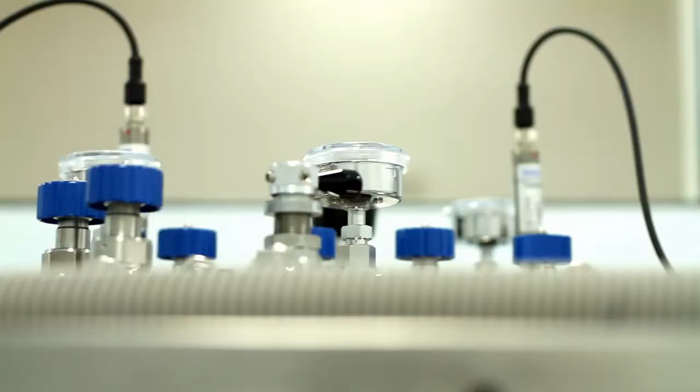Life is beautiful when it is certain and fearful when it is uncertain. The thin line between beautiful and fearful is safety of life.

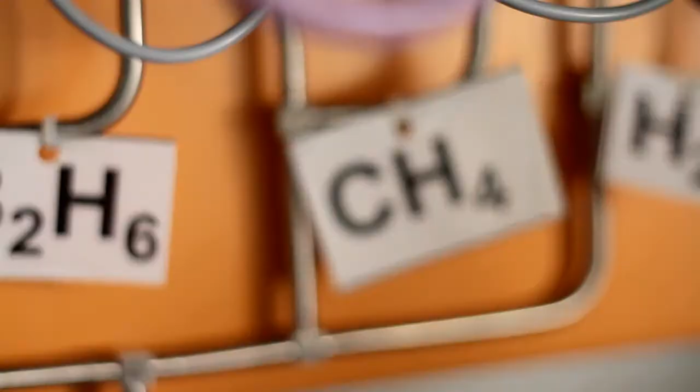We deal with a variety of processes and technologies. If not handled right, it can be quite disastrous to us.

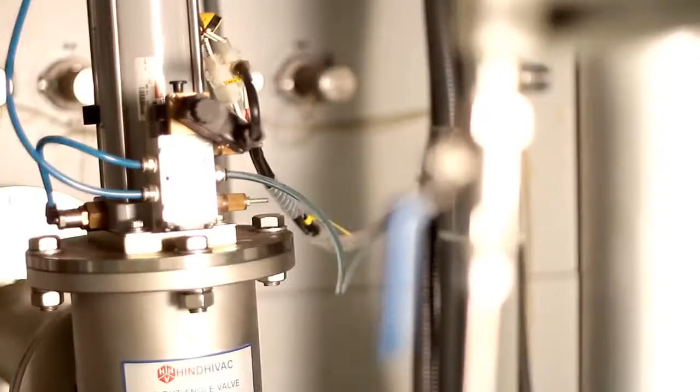This is an area where you want to work with somebody whom you can trust, with a lot of positive energy, which is what I find when I interact with the UHP team, both in their offices and in their sites.

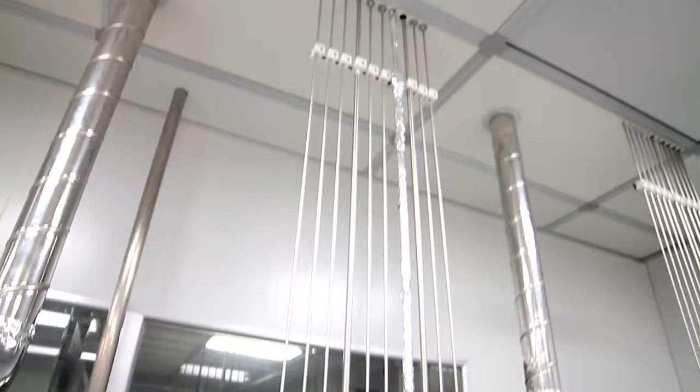We had to build the clean room with not just one gas, but 23 to 30 odd gases, many of them as toxic as silane, arsine or phosphine, where we needed complex piping which required a high level of safety.

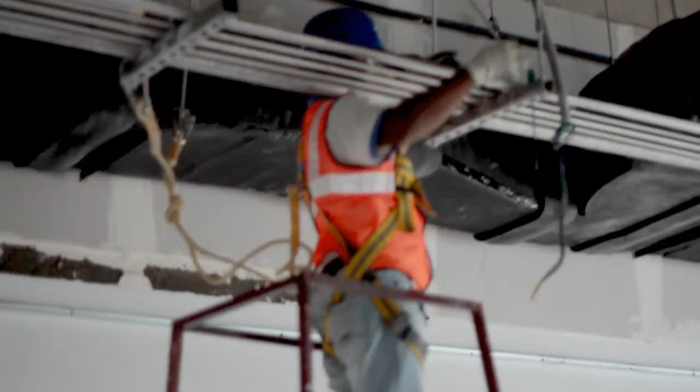And that's when the decision was taken that UHP will be our gas vendor. The key strengths of UHP are adaptability to change, innovation, management, execution, and of course the most important is safety. We get associated with them to do a lot of other projects where precision and accuracy are of prime importance.

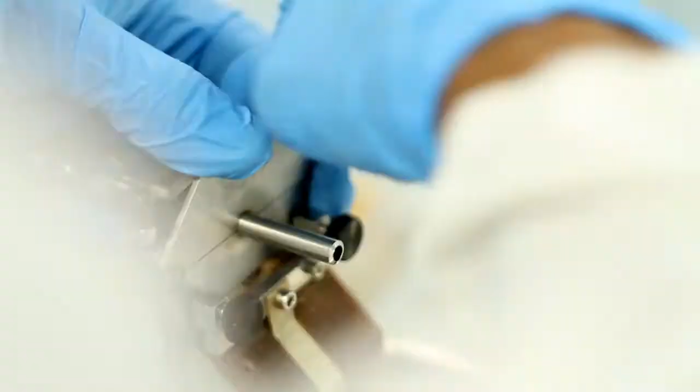When you have to set up such a complicated system involving 23 gases, you have to first make the blueprints or maps that show how the gas lines are running, what are all the individual components in there, and how you design the entire system.

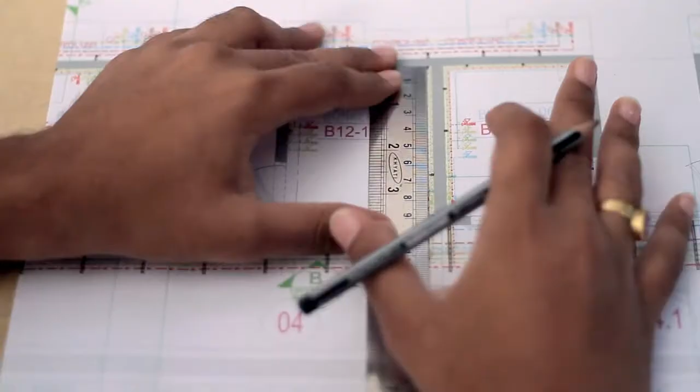And when I saw the drawings that came from UHP, they were even better than the drawings we received from the main contractor who was building the clean room.

They will take it very seriously. They would rectify if there was any mistake. If there was no mistake but it was perceived as a mistake, they would explain to us very politely.

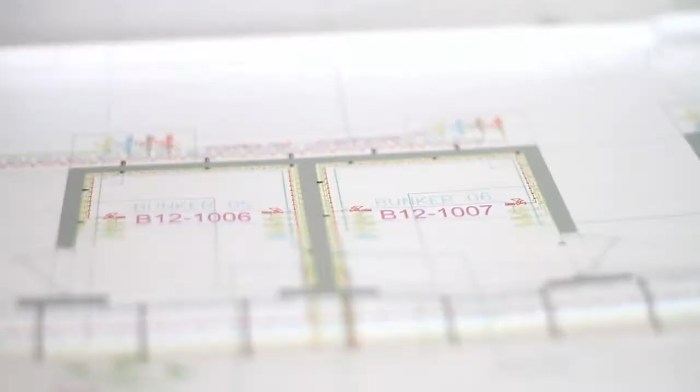They stay very close to the customer, taking feedback not just at the beginning of the project but throughout the execution. I have seen UHP Technologies putting a lot of effort into educating their customers, making them understand.

If I'm not wrong, there will be roughly around 100 employees, but if you see, they are working like 1,000. The way a company with 1,000 employees works, that is the unique way UHP Technologies work. I think it is one of the most unique companies I have ever seen in this field of engineering.

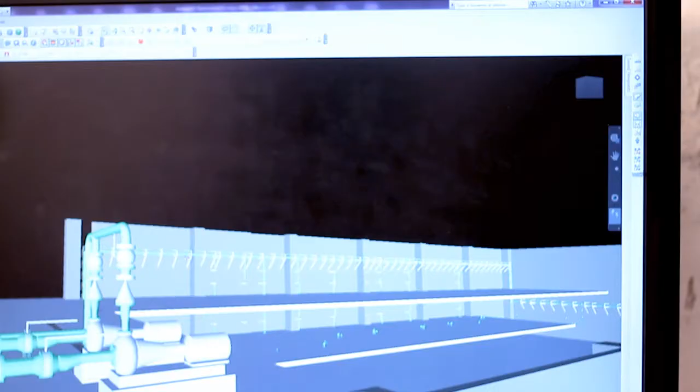Something UHP does is understand the customer pretty well. When we look at the design aspect of our solutions, we don't just limit our working to the current needs of the customer. We go much beyond the current needs and make sure that when the customer expands, when he goes into growth mode or the next level of expansion, he has all the vital elements to expand seamlessly rather than reinvesting for every basic need.

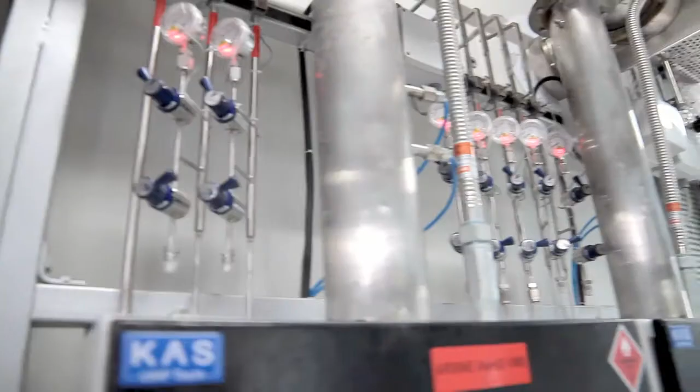During the course of the conversation, I felt that here was a man who understood the dangers of dealing with something as toxic as this. This is the first of its kind in the country. It's a company which has been providing total customer satisfaction.

If certain things are required to be changed during the course of the project, and we have constraints on timelines and budget, normally UHP comes with an idea that fits the timeline and also the budget.

In the DNA of the company, we compete with ourselves and we improve ourselves. I have always seen them innovating new things in their product line.

The detectors and their locations, the quality of the welding that they have done, the quality control they have put themselves through in terms of testing the lines for leak tightness, cleanliness, moisture content and so on and so forth - UHP did a far better professional job than the main vendor.

From all sides, you can say that the quality side was very good and the safety side was perfect. Only good words I can say about this company.

They leave no stone unturned to execute a project, and timely and within the budget.

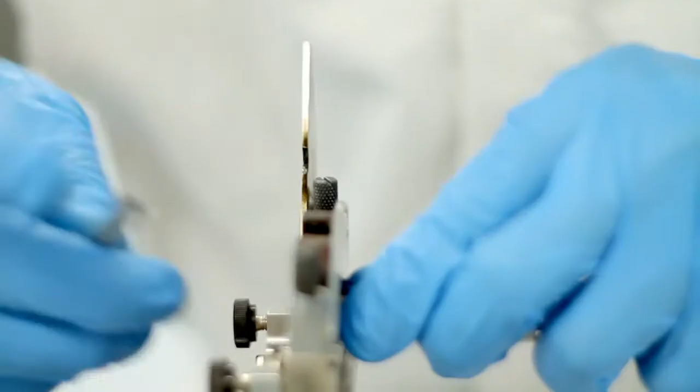My experience is in terms of the welding quality, the quality of the layout, the straightness or the clamping of the pipes - that was very, very well executed.

And although it involved a lot of piping, almost 3-4 kilometers of piping of various sizes, everything was very, very clean, and they also do the testing of the joints and then make a good recording of it.

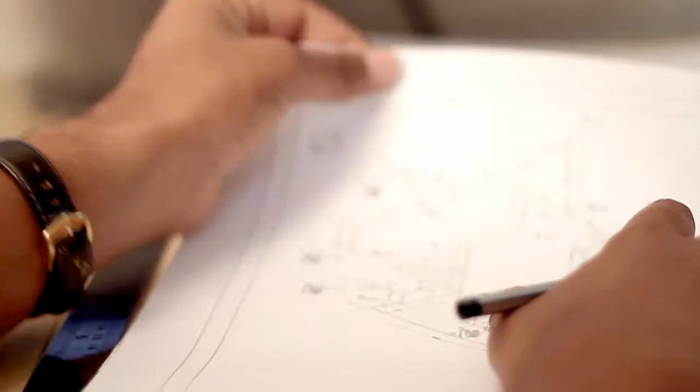When I say total solutions, it involves right from the concept, the design, the engineering and procurement, and then ultimately installing and validating that it is safe for the customers. So we don't find anybody in the Indian market who can compete in this arena.

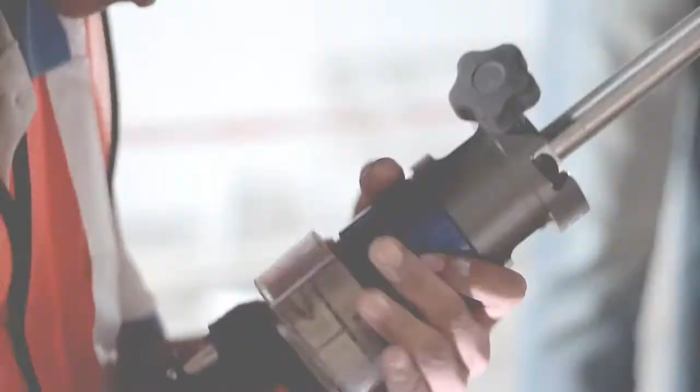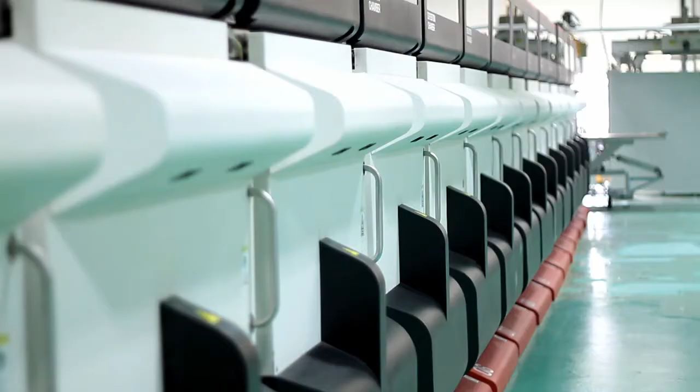What we generally say is that gas piping installation is not a science, it's an art. UHP has fulfilled all our parameters which we have listed. Their understanding of quality and the safety aspects of gas management went a long way in making sure that we set up the right plant.

Their engineers, their management take enough care to see to it that the client is fully satisfied with the work they execute.

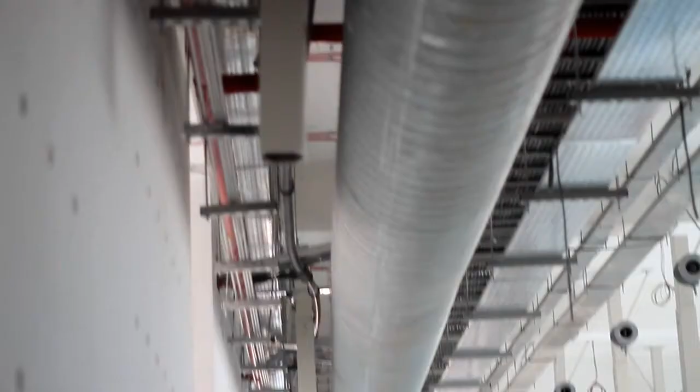We have done very large scale projects with UHP, and some of them were first in India and the biggest in India, and all along we have enjoyed working with them.

At the end, it comes out as an absolutely professional company whom you can trust, whom you can give a complex project and still sleep at night.

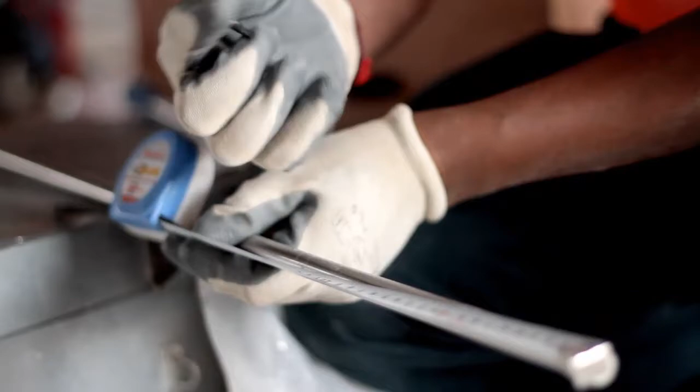Today we are able to provide customers at par with global companies, and at Indian cost.

If you ask for an ice cream, you are certainly sure to get an ice cream with a cherry on top, because that is what UHP Technology stands for.